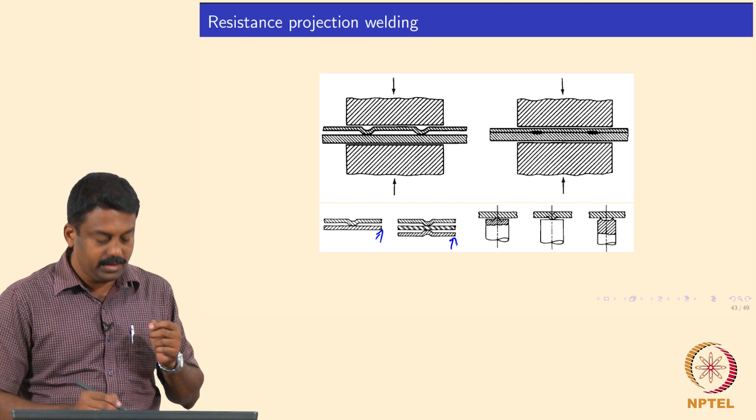This is done in various geometries, for example single sheets, and you can also do multi sheets to make laminates. In this case you may have 3 sheets welded together with some projections, and these are commonly used for welding studs or fasteners. These various fasteners have to be attached to a solid bed. You pass the current, the contact area leads to contact resistance, and subsequently you push and make a joint.

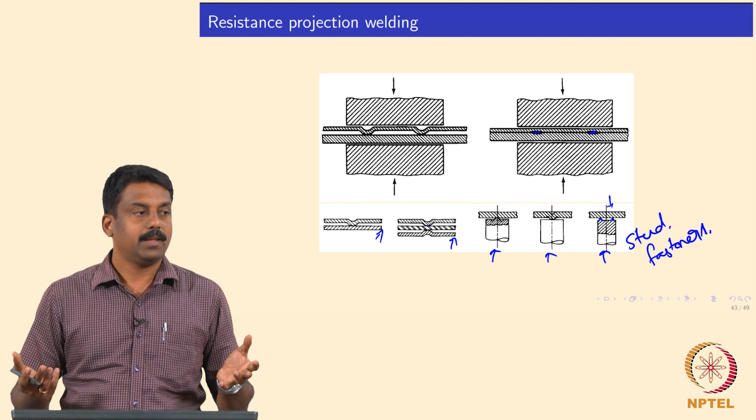Resistance projection welding with a slight modification in the discharge mechanism gives what we call capacitor discharge welding, which is very commonly used to weld studs, fasteners and thermocouples to any substrate. We will see that in the last slide. So this is resistance projection welding: we have a projection, apply a current and press it to make a joint. Compared to resistance spot welding, the advantage is you can do multiple welds in a single step.

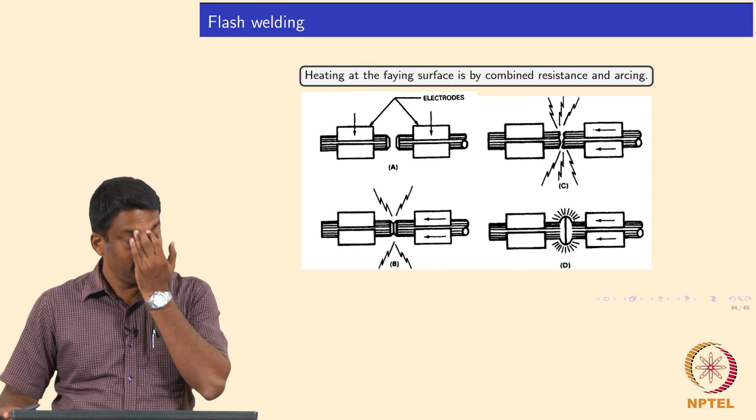The other variant of resistance welding is flash butt welding, one of the major variants after resistance spot welding. The most common application of this process is wheel making, the steel alloy wheels we use for vehicles and automotives. Those wheels are all made with resistance flash butt welding. So how is the wheel making process done?

You have a flat sheet, it is rolled and brought into contact, and in flash butt welding we don't keep both sheets in contact. We maintain some gap between the faying interfaces, as shown here, and then pass a current. When you maintain a gap and pass a high current, you start arcing, and arcing leads to melting of the interface.

For example, this is my surface roughness. When you pass a current, this point starts melting first. It arcs, and once it melts it explodes and becomes slightly flatter. Similarly the next point arcs, melts and explodes, and so on, and ultimately you make a more or less uniform interface.

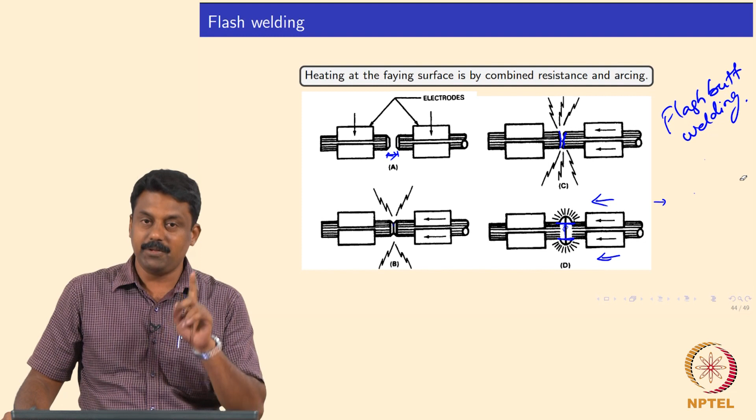Clear? This process is very commonly used to make wheel rims. Almost 99% of conventional wheels are made with flash butt welding. There is another variant of resistance welding which is similar to flash butt welding, known as resistance upset welding. The difference between resistance upset welding and flash butt welding is that in resistance upset welding we do not arc, we do not melt the interface.

It is important to understand the difference. In flash butt welding, the interfaces are not kept close to each other. There is always some gap maintained in the beginning, so that we can form an arc. Arcing is important, the interface will be molten, and then you do an upsetting. Whereas in resistance upset welding, we keep the interfaces as close as possible, and then we heat it up, and we do not melt anything.

We do not melt anything, we just heat it up, and the moment the temperature reaches a higher level, we do an upsetting to form a joint. The welding is done in the solid state; there is no liquid involved in resistance upset welding. On the contrary, in flash butt welding you always have a liquid at the interface. Because welding is primarily in the solid state, the interface must be prepared very well; otherwise oxides, contaminants or grease would be trapped inside the weld.

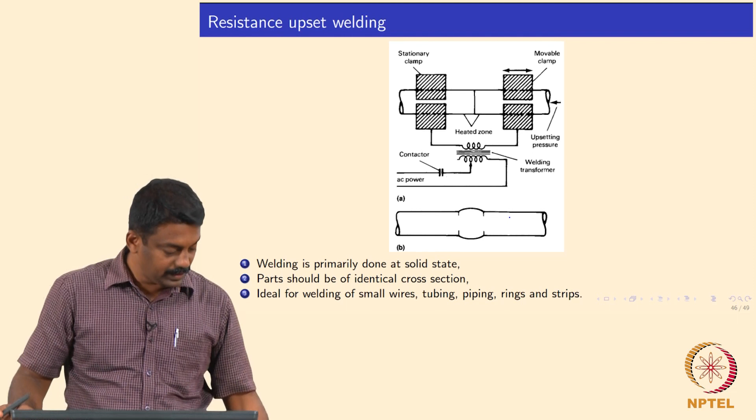Resistance upset welding is very commonly used for wires, pipes and tubes, where you keep the interfaces together and apply an upsetting force, so that you get mechanical deformation at the interface leading to joint formation. In both processes, the flow of material upon upsetting causes mechanical deformation, and in most cases the interface contaminants are pushed to the flash region. After deformation, the material is displaced toward the flash regions.

In flash butt welding it is very effectively done, because whatever goes out is liquid. The liquid would carry all the inclusions and contaminants which were there even before welding, and subsequently if you machine this off, you make a very nice joint. You take the interface contaminants out and you end up having a nice weld.

In resistance upset welding, generally the upsetting distance takes care of the contaminants issue. If you upset over longer distances, you also increase the flash distance, so whatever was there before welding would be pushed outside. With a higher upsetting distance, you send the original interface outwards, so any contamination you did not clean properly goes into the flash and you can machine it off subsequently.

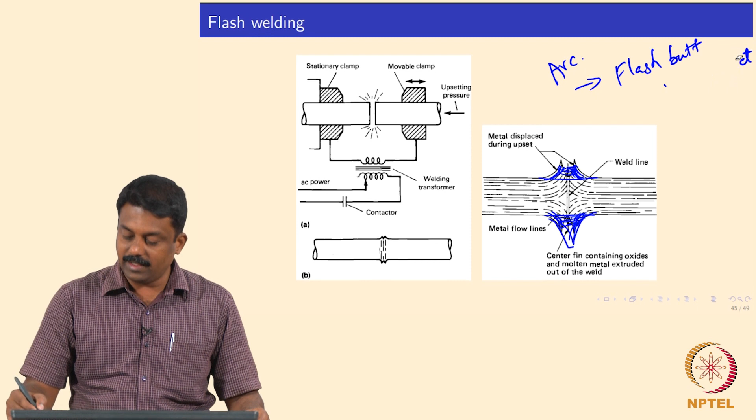So, we will have heating of the interface leading to decreasing yield stress, and then subsequently with a reasonably compressive load you can mechanically deform the interfaces and coalesce to form the weld. It is clear, the difference is very important. So, if someone says that both are the same, or says resistance upset welding is where the arc is there, then it is wrong. Okay. So, this classification is different.

So, there are some problems in both the processes, flash butt and resistance upset. The geometrical alignment should be perfect, it should be coaxial. Suppose you are welding two tubes by resistance upset welding, if they are not aligned properly you have a serious problem, right. In this case I have just given a couple of examples. So, if the axes of the tubes are not aligned properly, obviously you will end up smearing the pipes, okay. And this is a very common problem even in wheel making.

If there is a small misalignment and you have, say, 2 mm, 2.5 mm sheets that are commonly used for wheels, this is one edge of the wheel, and the other edge should be perfect. If the other edge is somewhere here, because the most common problem in the rolling of circular pipes is spring back. Okay, so if spring back is not controlled properly, suppose I extend that, okay, something like this, a cross section. Okay, anyway, it's not symmetric.

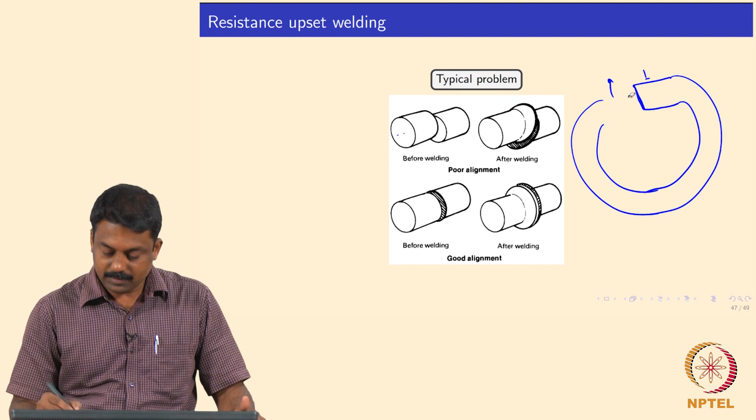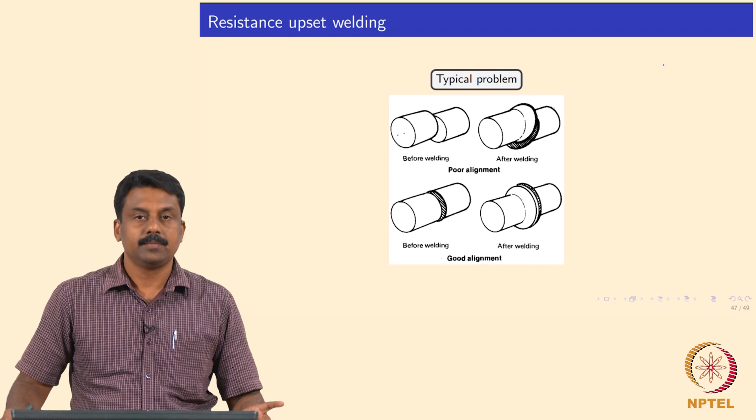Imagine this is a toy car. Okay, so the wheel is like this. So now if there is a spring back, obviously the joint will be different, isn't it? So now if you are doing flash butt welding, the alignment will not be proper. So there must be an additional arrangement with the clamping, so that this can be pushed and this can be brought down, so that you will have a perfect interface, and then you can make a joint, right. So this alignment problem is very critical, and there are ways to overcome it. That actually comes from the equipment manufacturer, and these problems can be tackled very easily, right.

So the last in this variety is commonly used for welding fasteners, studs, bolts into bodies using a capacitor discharge. Okay, so it is like a gun. You will have a capacitor giving a discharge of current in a short time, very high frequency as well as very high amperage current sent as a short burst, so it is like a gun, a stud gun. So in this process the welding is done by rapid release of electrical energy in a very small time, and it is an extremely rapid process.

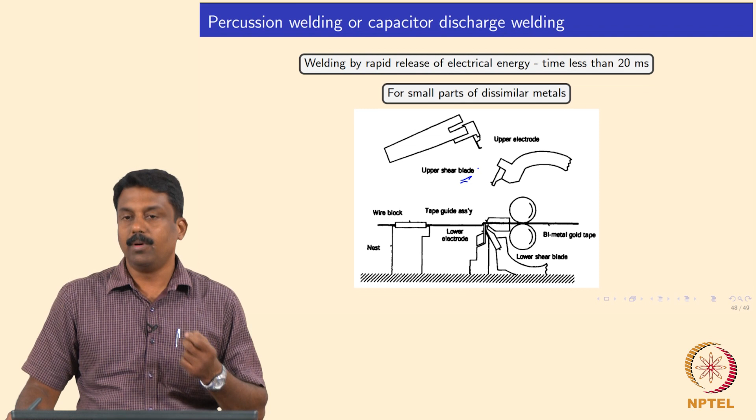We pass positive and negative ends, then you discharge a current, and simultaneously you also apply a compressive load. The electrode is sometimes dropped on its own weight onto the sheet, and the moment you have contact, a large amount of electric energy is discharged. So in that process you end up heating the edges, and there is also a compressive load acting on the surface, leading to weld formation, right. And this process is very commonly used for welding studs and bolts to the body of vehicles. For example, I just showed a schematic, and these are done with the gun.

If you look at automotive industries, it is commonly used in the front below the engine placement. The engine and the bodies are placed over the fasteners, right. Those fasteners are welded to the bottom panel, and if you take out the engine of a vehicle and look at the bottom panel, there will be lots of studs and bolts attached to it, and those bolts are attached to the panel by capacitor discharge welding. So there will be one robot with a gun. This can also be done with a hand gun as well.

So you fill it with a bullet, which are now studs or bolts, and then you bring it in contact, something like this, and press the trigger, you discharge the current at the interface. Simultaneously you also use an air gun or something like that. The stud will be going towards the piece. The moment you have contact, the electric current is discharged, and you melt the interface and form a solid joint. So this is commonly known as percussion welding, or capacitor discharge welding.